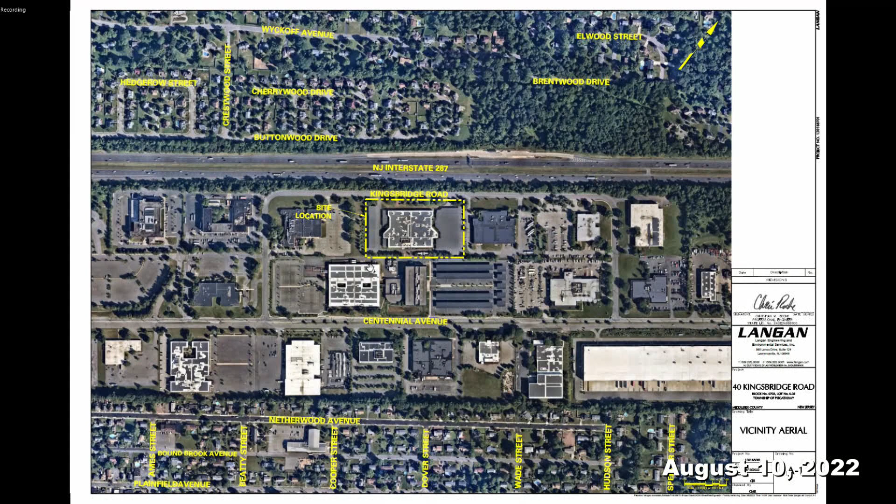Moving to Exhibit A2, entitled Existing Site Conditions, also dated August 10th, 2022. This is a more zoomed-in aerial view of the existing conditions on site. The site is presently occupied by an existing office building with a footprint of approximately 80,000 square feet, along with associated parking. Both the parking and the building have existing solar panels present on them.

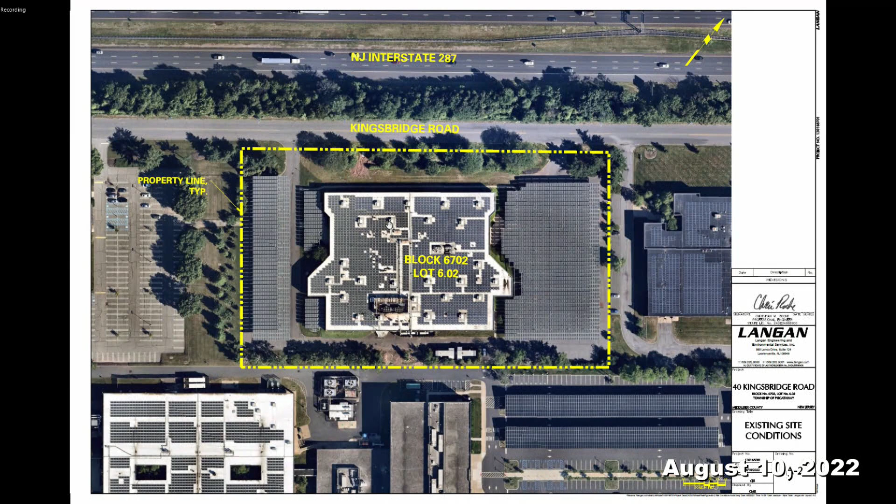Existing access to the site is presently provided at two locations: an eastern access drive and a western access drive. The entirety of the property is located within the 40 Kingsbridge Road redevelopment area, with the underlying zoning being LI5, light industrial. Moving to Exhibit A3, also dated August 2022, entitled 40 Kingsbridge Road Site Plan Rendering.

What the applicant is looking to construct on the property is a speculative warehouse building with a footprint of approximately 100,673 square feet. Of that, approximately 5,000 square feet would be utilized for office space, and the remaining 95,673 square feet would be utilized for warehouse use. As mentioned by Ms. Jennings, the application and site design is fully compliant with the redevelopment plan.

We're not seeking any type of bulk variances or design waivers here this evening. From a parking perspective, the redevelopment plan requires one parking stall per 1,500 square feet of warehouse use and one parking stall per 200 square feet of office. Doing the math on the aforementioned square footages, the application is required to have 89 parking stalls on the property, and we're proposing 89 parking stalls, so the requirement is met.

Each parking stall will be 9 feet wide by 18 feet deep with 25-foot wide drive aisles, which meets the redevelopment plan requirements. We'll be providing 47 parking stalls on the northern side of the building, as well as an additional 42 parking stalls on the eastern side. Included within those 89 stalls are 5 ADA parking stalls and 4 electric vehicle charging station stalls, so we're meeting the requirements for EV charging stations as well as ADA requirements.

We are proposing a loading area in the southern portion of the site, which will contain 32 loading docks. That area is proposed to be enclosed with a 6-foot high vinyl coated chain link fence, mainly for security and safety purposes. Access to the site closely mirrors the existing site access configuration, with an access point in both the western and eastern portions of the site.

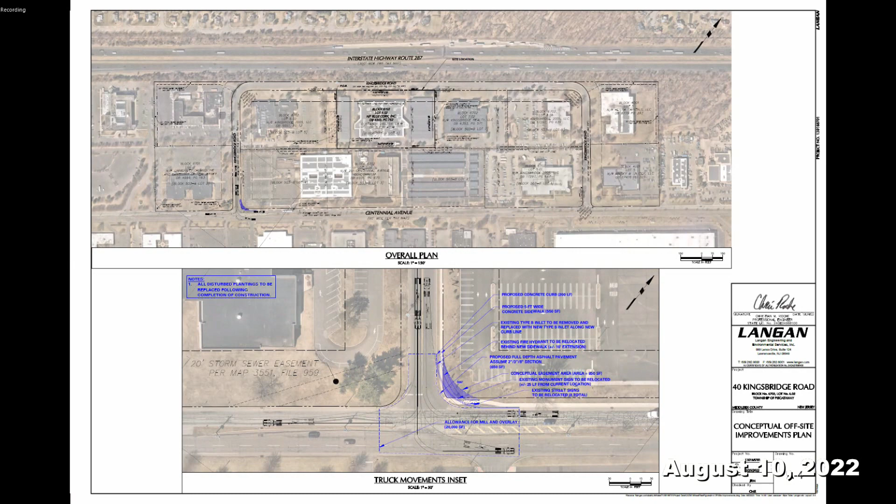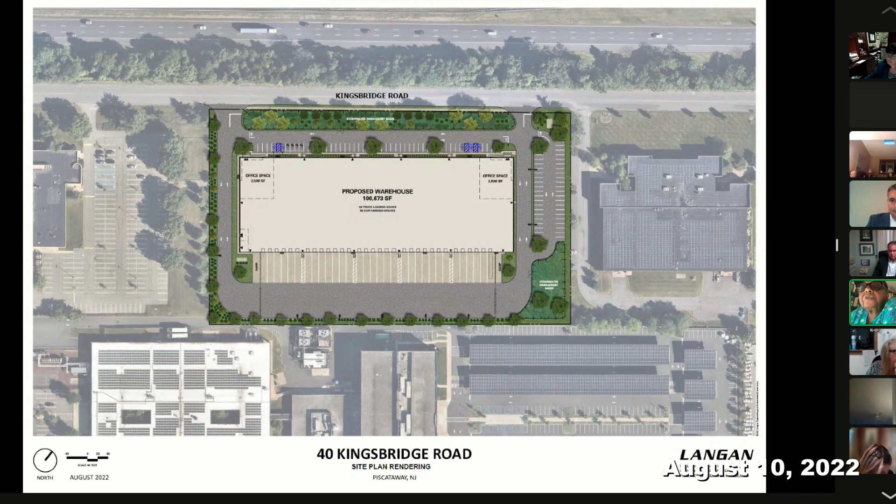That's really all the direct testimony we have from Chris at this time. Again, it's a fully conforming application consistent with the redevelopment plan that was created specifically for the site, and it's consistent with the redevelopment agreement. So we could move on to our next witness unless there are specific questions. Let me just see if the board has any questions. Board members, do you have any questions of this witness presented so far?

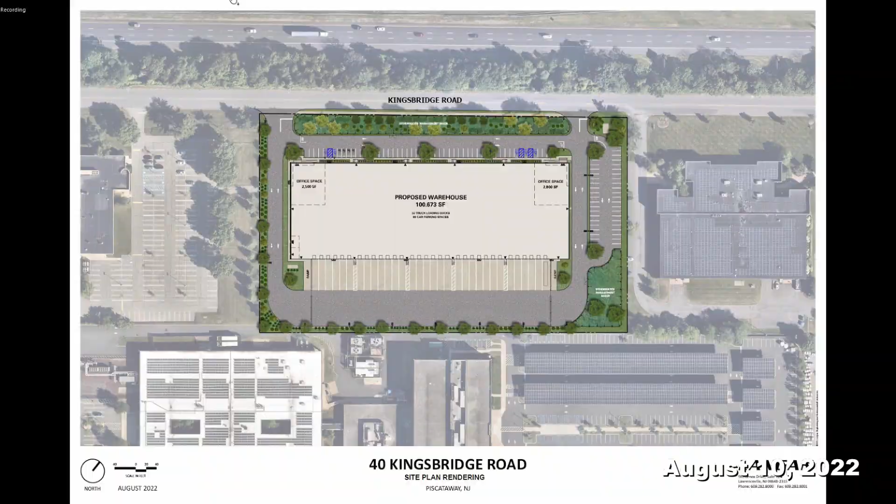Madam Chair, this is Councilwoman Kale. I'm not sure if Mr. Roche is the right person to ask - are we going to get testimony about the actual building itself and the structure? Yeah, we have an architect that's going to come next. Okay, very good. Thank you.

Okay, then let me go to the public. Ms. Buckley, do you see anyone who has any questions of this witness? No one, Madam Chair. Okay, thank you. Then close to the public. Ms. Jennings, you may call your next witness. Sure, Scott Daniels.

There he is, his hand is up. I see him, right here. There he is. I'm sorry, this is the court reporter.

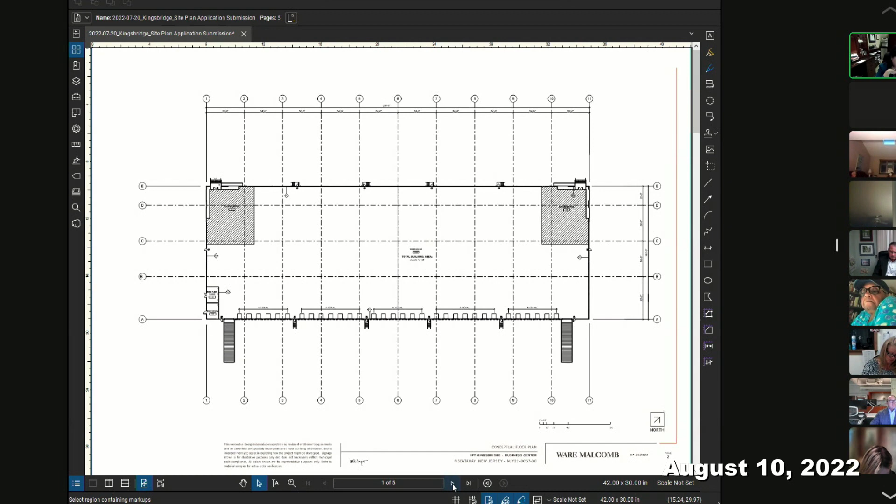Okay, and if you just want to move right into your elevations. The elevations here depict - sorry to interrupt, Mr. Daniel, this is exhibit A6. Correct. Thank you. And that's the elevation rendering?

The elevations show the north elevation, east elevation, west elevation, and the south elevation. The north elevation shows the front of the building. It shows the two entrances delineated on the corners, and it shows how the elevation breaks up the monolithic rectangular form by use of vertical lines and different colors and glass within the entry points. The same is true for the east and west exterior elevations, which are the shorter in length elevations. Those also utilize vertical elements to break up the elevation itself.

The south elevation, which is the rear elevation, is where the docks are, the truck docks. As you can see, the 32 truck docks and the two entry ramps into the building. We also have clerestory windows for use of natural light, so as to make our building much more energy efficient.

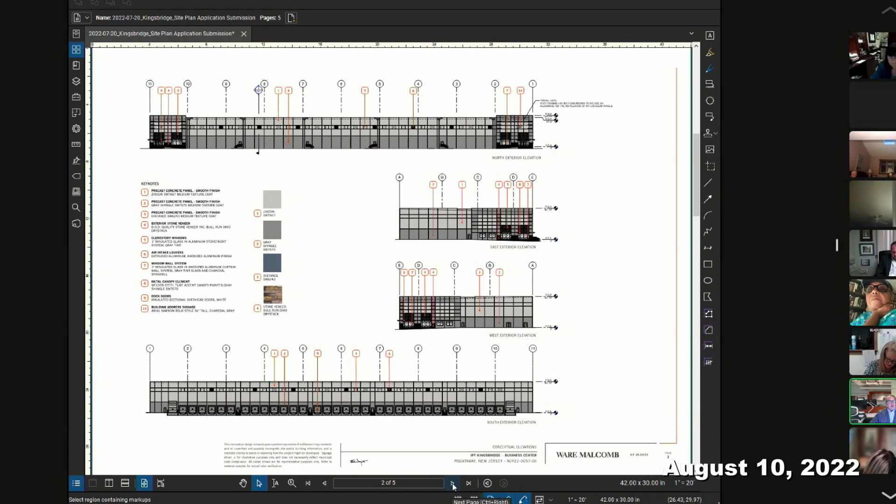Mr. Daniel, I think that's the conclusion of your testimony. Yes, it is. Thank you. You're welcome.

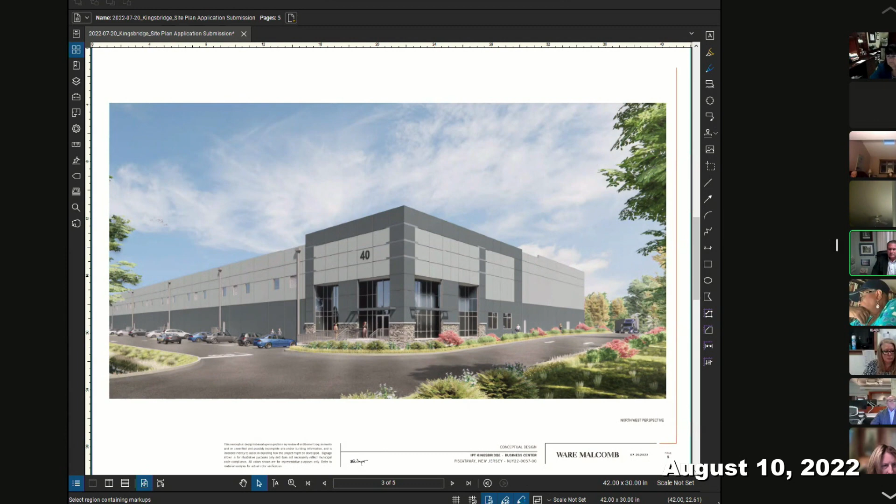Members of the board, you've heard the testimony. Does anyone have any questions of this witness? Please unshare your screen, Mr. Daniels. Yes. Thank you. You're welcome.

Madam Chair, it's Councilwoman Cahill. Thank you. So I heard your testimony about the roof being solar panel ready. Maybe you don't know the answer, but do you know the intent of when solar panels might be installed on that building? Is that something in the owner's purview to do soon, or we don't know that? We don't know that. There's no tenant right now, so that's not something on the table right now, but it is ready, and in the future they would do it.

So each of the tenants would be responsible for putting solar panels on? In the future, yeah, if they want it. It's just ready for them, but it's not being discussed right now. So the owner of the building is not going to put them on? It would be up to each tenant to do that if they wanted to. Right, thank you.

Any other questions from any of the other board members? Okay, Ms. Buckley, would you check and see if this witness is open to the public for questioning? Would you see if there are any members of the public interested in questioning this witness? No one, Madam Chair. Thank you.

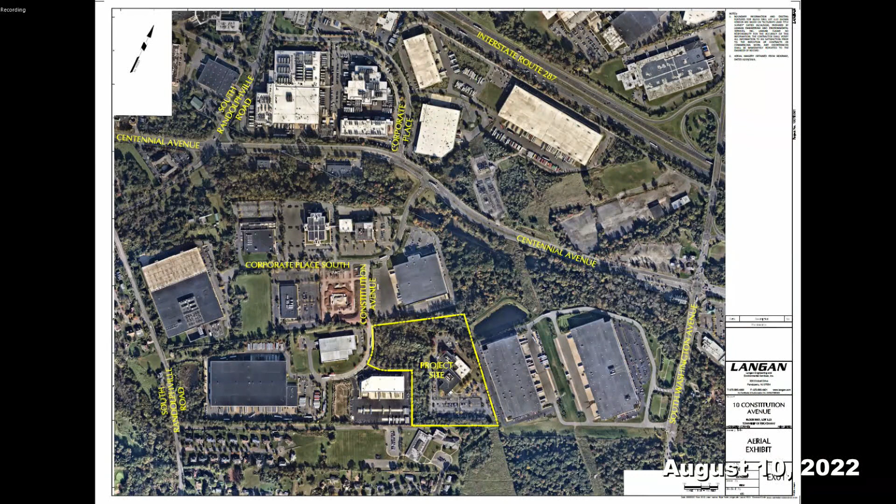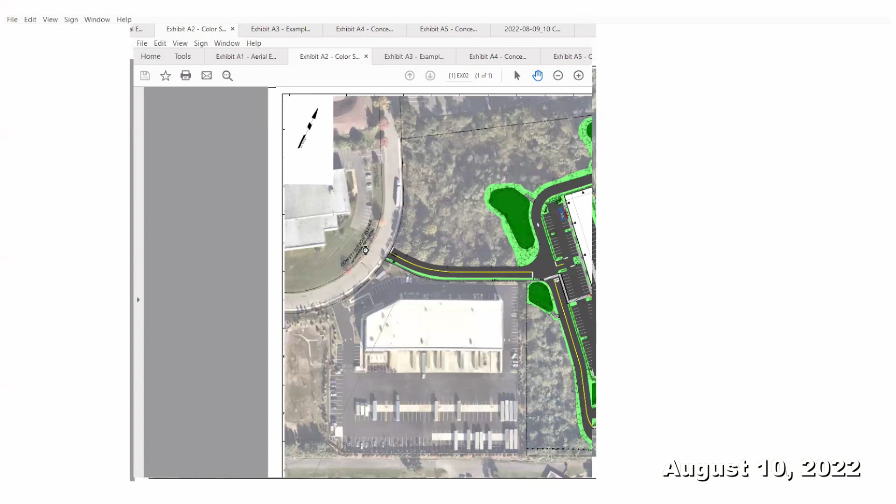So I'll move on to the next exhibit, which should help me describe. Exhibit A2 is a color rendering of the proposed site plan, marked Exhibit A2 or Exhibit 2. This shows the proposed 147,000 square foot warehouse building. As was mentioned already, this use is in compliance with the redevelopment plan, and it is in compliance with all of the bulk standards in the redevelopment plan with respect to lot coverage, building coverage, setbacks, etc.

Let me go on to describe the site circulation. You come in off of 10 Constitution into the existing driveway. Those of you familiar with the site know this is the long driveway with the nice alley of trees on both sides, and that's going to be maintained. This 30-foot wide driveway will be the only access to the site. Cars and trucks will share the driveway, and then cars will go either straight into the car parking lot or make a right and enter the car parking lot from the southern parking lot access.

There's 121 car parking spaces on site, so quite a reduction from the existing office building. Tractor trailers will circulate in a counterclockwise manner, making a right turn, coming along the southern boundary, traveling north through the truck court, dropping off their trailer, perhaps picking one up, and then leaving via the northern end of the truck court, circulating west and leaving the site, again continuing in a counterclockwise manner.

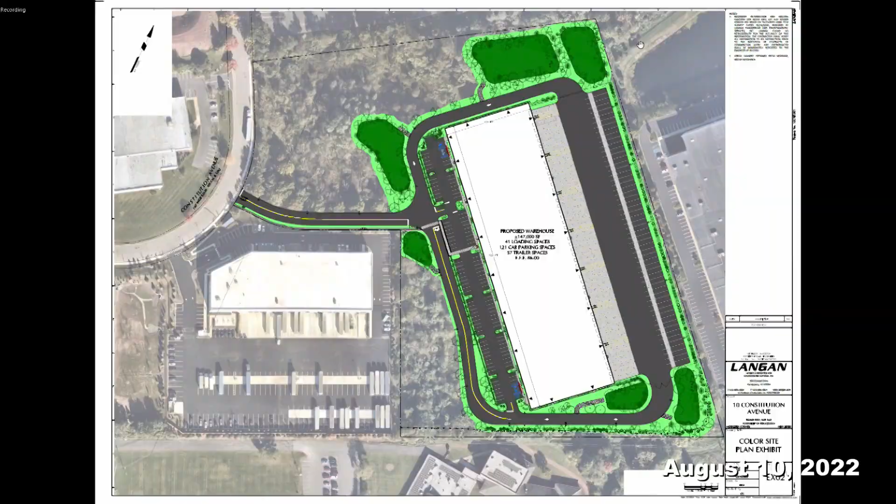Oh, thank you. Mr. DeGrees, I did fail to mention also the CME report of Mr. Hinterstein of July 26, 2022. There are two points in that we should address - I can address one, the architect can address the other. In the application we show 3 EV stalls; there should be 4 EV stalls, and we will add the 4th EV stall in resolution compliance, should we be approved this evening.

Okay, so again, no objection and no problem complying. That's correct. Okay, is there any questions from the board? Members, any questions for Richard?

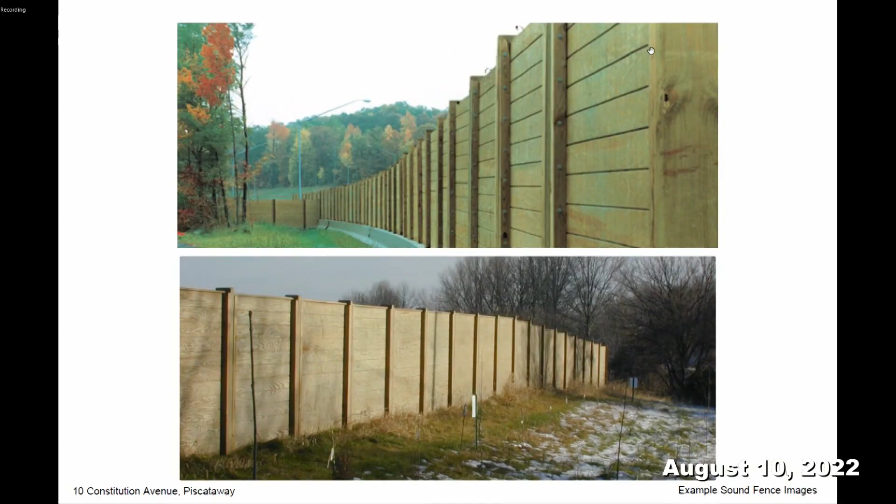Let's start with describing what A4 is, and then you can get into your testimony. Sure, A4 is a conceptual floor plan, just an overall floor plan of the building.

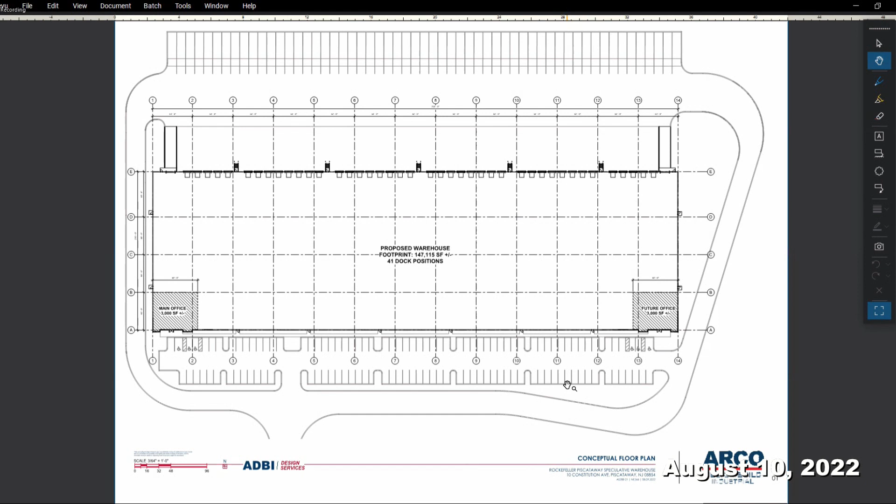So I'll move into A5, and these are the conceptual elevations, exterior elevations. The building perimeter will be constructed of tilt-up concrete panel construction, and we'll use reveals to define a paint scheme consisting of neutral colors, like a light, medium, and dark, as you'll see.

At the entrances, we have glazing and canopies to define each entrance at each end of the building, with clerestory windows along both the front wall and the back wall for some natural light. We're showing signage at each entrance, which is in compliance with the redevelopment plan.

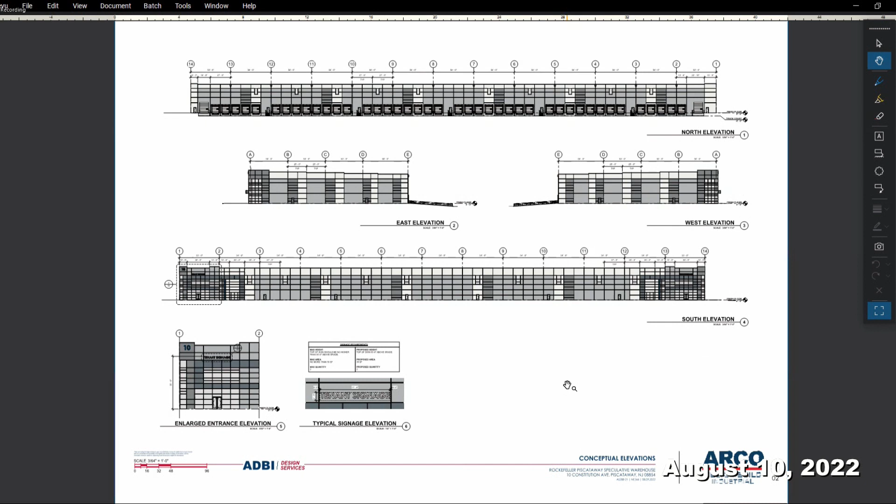I'll call attention to a recent project by this applicant in Piscataway, the Middlesex Logistics Center. This is similar in design, but with some enhanced features, so some taller glazing, the bump outs to help define the entrance, and just greater variation with the reveal patterns, the clerestory windows, and the paint scheme colors.

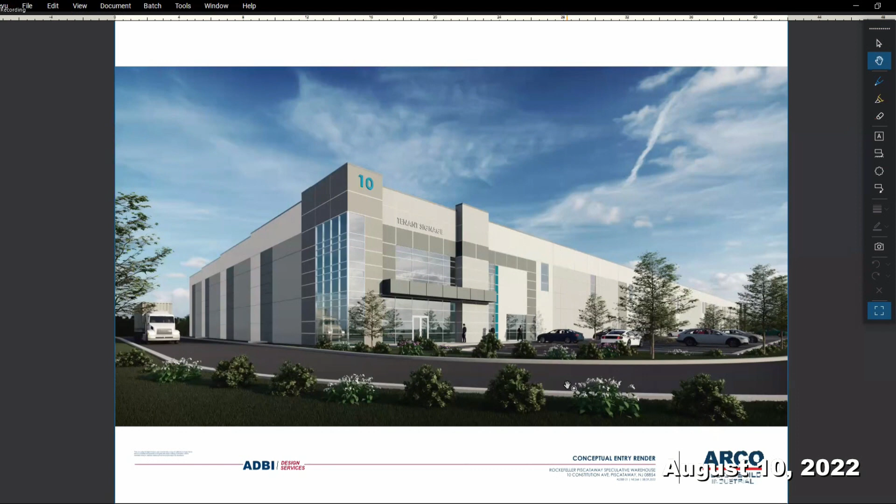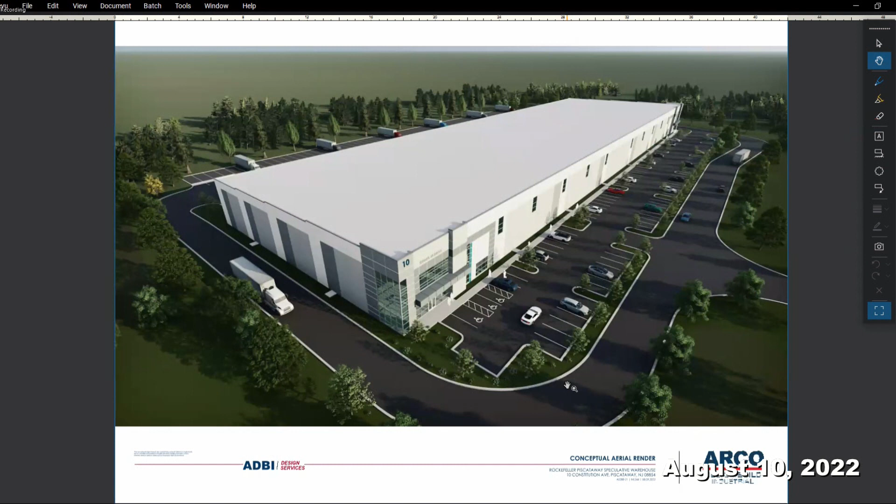Moving into A7, which is an aerial rendering, it kind of paints the whole picture together. You'll see this is still that same front corner of the building where you'll see the entrance canopy, in addition to the movement throughout the site, the counterclockwise flow of trucks, and just an overall look at the building from the front.

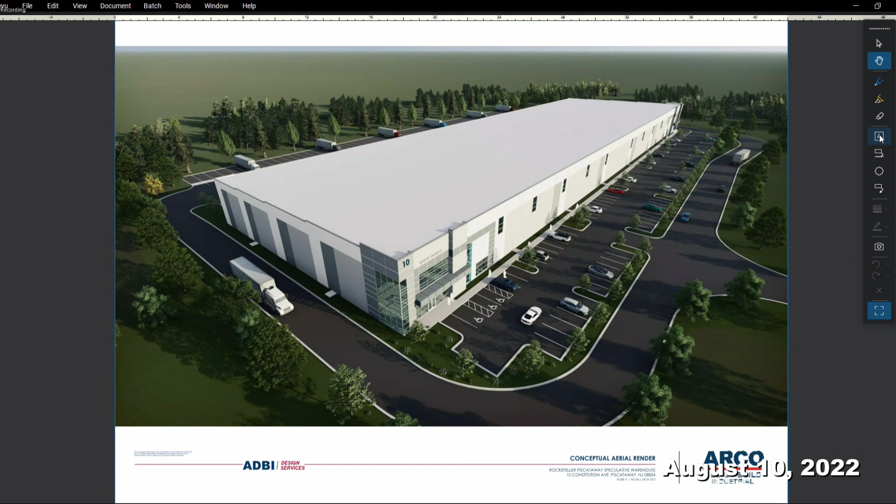And you'll comply with the township ordinance with regard to the equipment? Regardless of size? Okay, thank you so much. Great, thank you. Can you stop sharing your screen, Mr. Ferrier? Sure.

Your next witness, Mr. Grayson? That was actually the last witness as part of our direct testimony this evening. We have a whole team with us, so if you have any specific questions we can address them. I think we've already gone through and addressed all the issues and concerns raised in the reports, and we're happy to answer any other questions. Otherwise, as stated at the beginning, this is a consistent plan with both the underlying zoning ordinance and the redevelopment plan. We're not requesting any variances. That basically sums it up.

Thank you, Mr. DeGraza. All right, board members, you heard the statements from the various different witnesses that came forward. What is your pleasure in regards to this application? Do I hear a motion?

Mr. Chairman, it's Dawn Corcoran. I'd like to make a motion that we approve the application subject to all of the reports discussed, also subject to the installation of the communication repeater system, and that should cover it, along with sidewalks and so forth. The sidewalks are shown on the plan. Okay, that was on the plan. Do I hear a second?

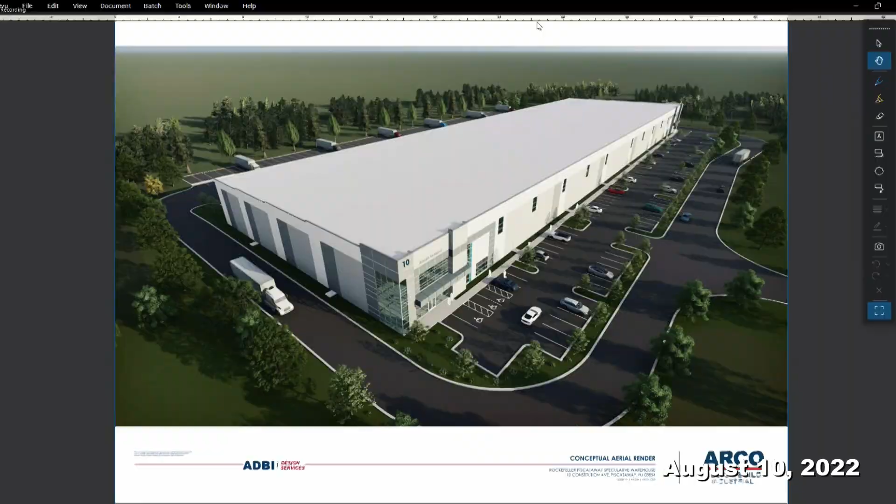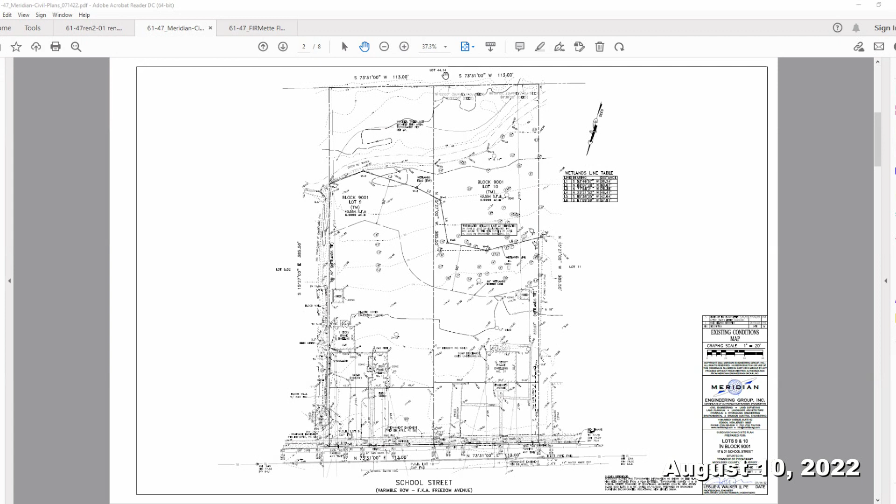The site sits on the southern side of School Street in Piscataway, numbered 17 and 21 School Street, lots 9 and 10 in block 9001. To the east, north, and west sides are existing single-family residential. To the south is what I believe is called the Villas at Fairway, a pretty large-scale development.

On 17 School Street, here's the existing home Mr. Wiley was mentioning, with a driveway. The existing one-story dwelling, former garage, was converted into an apartment use at some point, which will be remedied by converting it back to a garage. Behind that there's an existing shed. On 21 School Street, on the right side of our plan, there's an existing home and shed, and that home and shed will be removed to make way for one of the new homes to be constructed.

Is that shed being removed, the one that was in the easement? Yeah, there's one shed in the back here. I was going to get to the wetlands - there's a tiny little corner of the concrete slab in the front that's shown in the required wetlands buffer. That shed and the concrete pad are being removed.

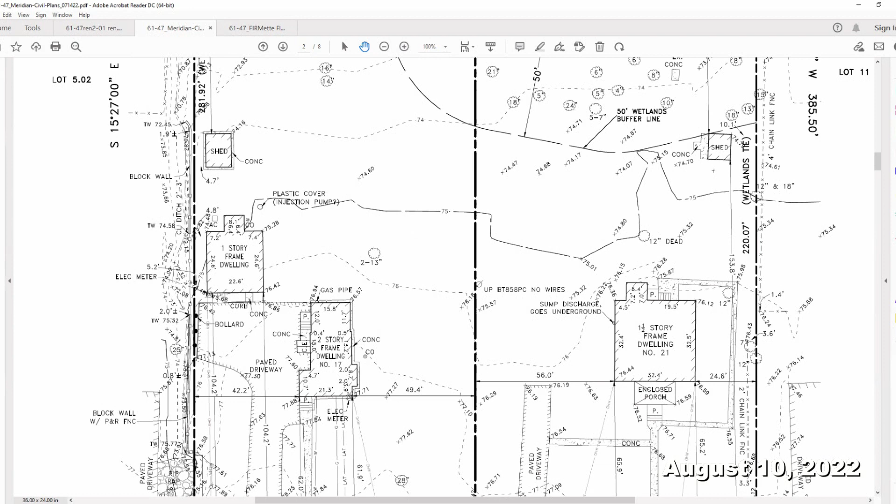Okay, now I will switch over to the colored site rendering, exhibit A1. So you can see here's the existing dwelling, converted back garage shed, on 17 School Street. We're calling it Lot A for right now. Then two new homes on Lot B and Lot C, moving eastward.

Each home is called a 4-bedroom with an in-law suite, so technically 5 bedrooms. The in-law suite is just a separate bedroom with its own private bath, but those are technically 5-bedroom homes.

The back of the site, up at the top here - I don't have it colored blue, but there's a ditch that runs along the back of the property. That's mapped as a tributary, an unnamed tributary to Ambrose Brook. There's a very small sliver in the southwest corner of the site with a mapped flood hazard - it's hard to know exactly where that falls along the ditch, but it's just the appendage of a mapped flood hazard on that back corner at elevation 69, and you can see the elevations back in that area are consistent with that. Here's the 69, and then you get up to 70, 71, 72 as you come up towards the development site.

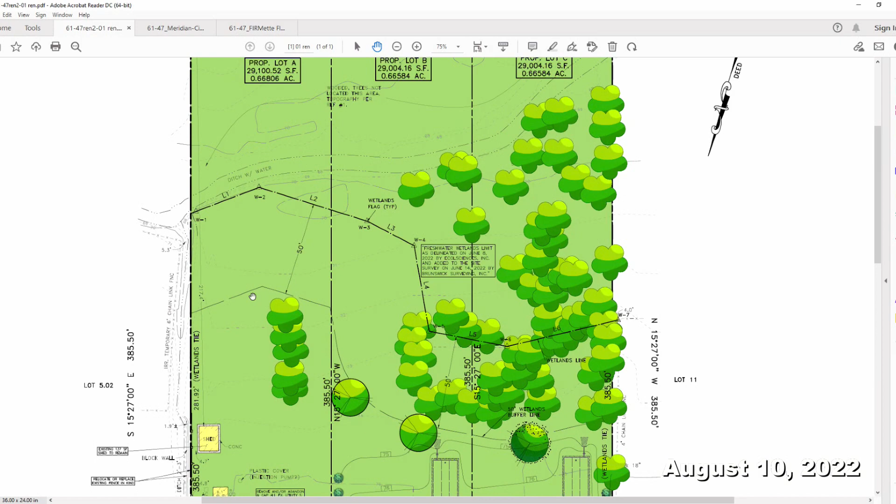So we discussed the proposed homes - they'll each have a 2-car garage and a 20-foot wide driveway. Residential site improvement standards require 3 parking spaces for a 5-bedroom home, and we'll be providing 2 in the garage, and a 20-foot wide driveway counts as 1.5 spaces. I don't know how you park half a car, but 20 feet wide is a reasonable width for actually 2 cars - but as far as RSIS goes, it counts as 1.5. So we'll have 3.5 spaces where 3 spaces are required.

Maybe we should review the bulk standards here. Yep, I'm gonna circle back to those.

So we talked about the flood elevation - the mapped flood elevation in the study is elevation 69. You'll see the basement floors on the proposed homes are at elevation 72, so 3 feet above that.

All utilities are available in School Street, so we can tie right into the existing utilities out there.

We're taking down 11 trees and proposing to install 14 trees, so we meet the tree requirement. One slight variation, noted in one of the professionals' letters, is that based on the width of the site we're required to have 5 street trees. Right now we show 4 trees out there and then 5 kind of behind the sidewalk. Hopefully those 5 will be sufficient, in addition to the 4 that are out there. Between the driveways and all the utilities, it's tough to find a spot between the curb and sidewalk to stick another tree, but we'll work with professionals to make sure they're happy with that. But we do show more trees than are required.

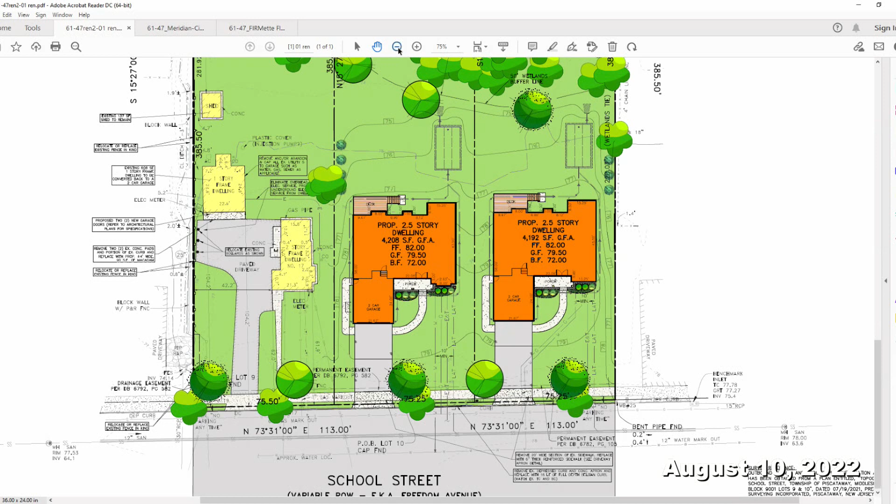For variances, the existing lots total just under 2 acres in total. Each existing lot is 6 square feet under a full acre. Each proposed lot will be over 29,000 square feet, where 10,000 square feet is required - far in excess in size. As far as lot width, these lots are 385 feet deep. The required lot width and lot frontage are both required at 100 feet, and we are proposing 75.5 feet. There are several lots in the neighborhood that are also 60, 80, less than 100 feet, but because of the depth of these lots, we far exceed the required 10,000 square foot lot areas.

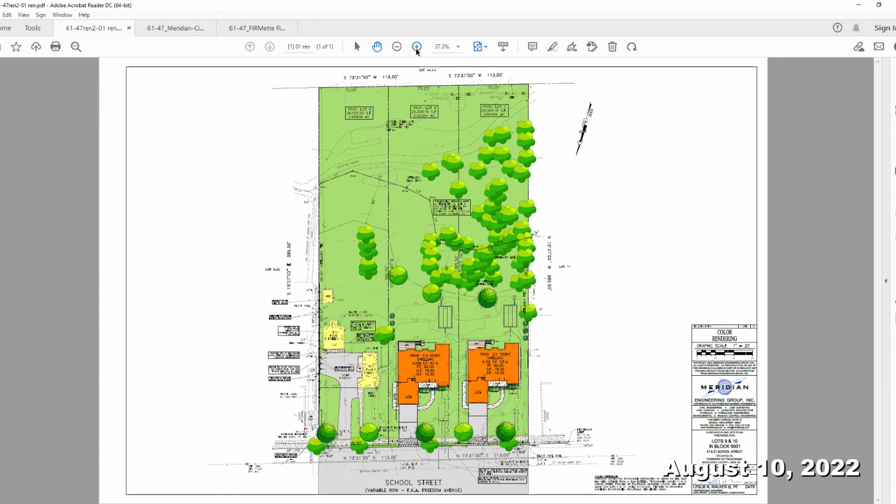We have some existing condition variances. One is for the side yard of the accessory building on 21 School Street, but that's being removed, so that's eliminated. Then for the sides of the shed, it will be returned to a garage - the required is 8 feet, and we have 4.7 and 4.8 feet on those 2 existing structures. And then there's the use of that garage converted to an apartment that's non-conforming, which will be corrected by this application.

There's also a fence - it's hard to see here, but there's a municipal drainage ditch that runs on the side of the property in an easement, and the fence right now wraps around the front and goes around that head wall and back down. Right now a portion of that fence is in the municipal easement on the adjacent property, and we're going to remove that and replace it back onto our site to eliminate that encroachment.

I don't believe there's any other required variances or existing variances that need to be discussed. And I think that's all we have. Does the board have any questions of this witness?

Madam Chairman, it's Dawn Corcoran, if I may. Oh, Madam Chair? I'm sorry, I was muted. No worries, I was wondering, I just had a question, go ahead.

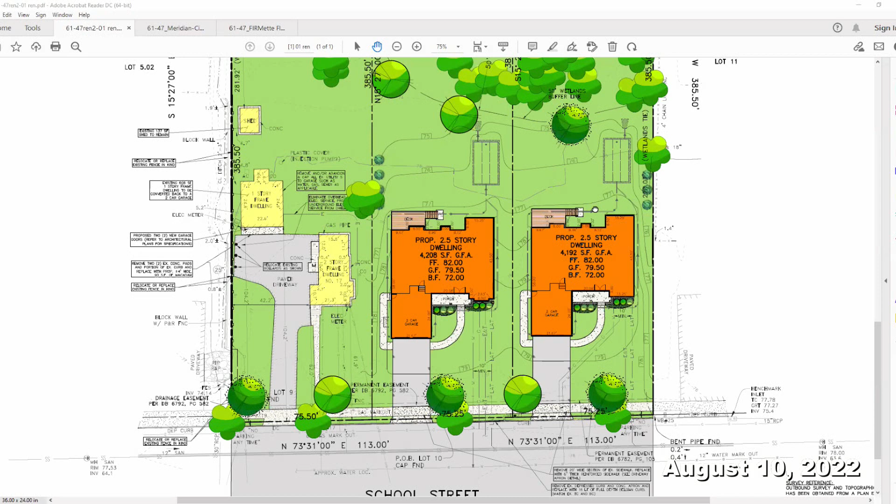Yes, we have quite a bit of room - let me bring that plan back up. This is Exhibit A1. You can see here's the back of the home, and then you have still another close to 50 feet until you get to the wetlands buffer. The dry wells can be reconfigured sideways if needed. The lots are 75 feet, and the homes are about 57 feet wide. So if you were to take 5 or 10 feet off the width and add it onto the back or come up further in the front, you could certainly do that without any concern with the wetlands buffer, which is the closest restraint we have in the back.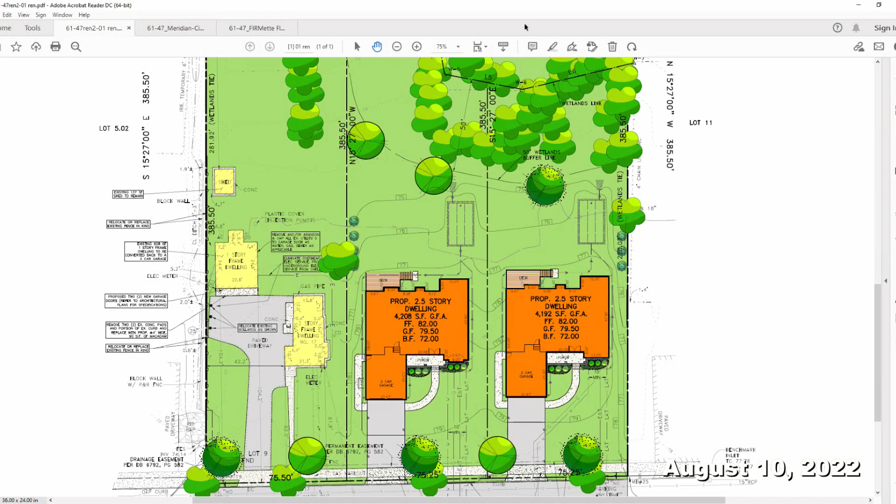Okay, thank you, that satisfies my comments. Thank you, you're welcome. Any other questions from the board?

Okay, I'm going to open it up to the public now. Ms. Buckley, do you see anyone who would like to ask a question? There's Eaddy, 13 School Street. She's waiting. Go ahead.

Good evening. Wait, you have to be sworn in first. Can you please raise your right hand? Do you swear the testimony you're about to give will be the truth and nothing but the truth? Yes. Thank you. Can you state your name and spell your last name, ma'am? It's Viola, Eaddy, E-A-D-D-Y.

And where do you live, ma'am? I live at 13 School Street, Piscataway. Oh, the label should have told me. I apologize, I'm in lot 8.02. Okay, what did you want to ask, ma'am?

Yes, I wanted to ask, I know the property across the street is the red home, and it has the other little house in the back and another shed. I was wondering, he's saying he's going to build two new homes. Is the original home remaining?

That's correct. Right, the original home, 17 School Street, will stay. 21 School Street will go away, that one will be demolished. Okay, and then they put... it's not the red home across the street?